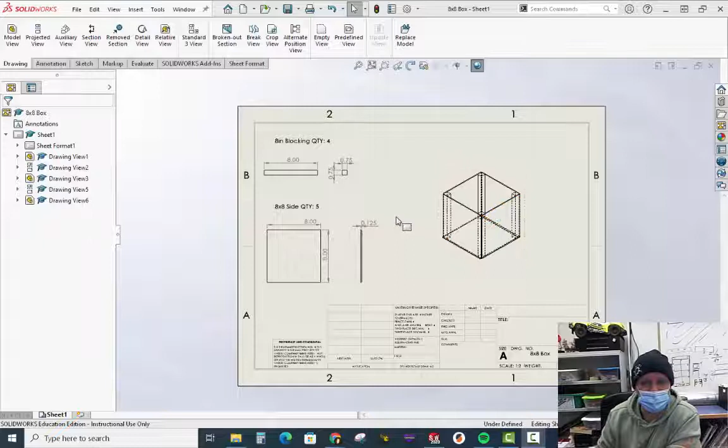All right, I am going to completely delete this file so I can start over. Blank SolidWorks, I'm going to go to New.

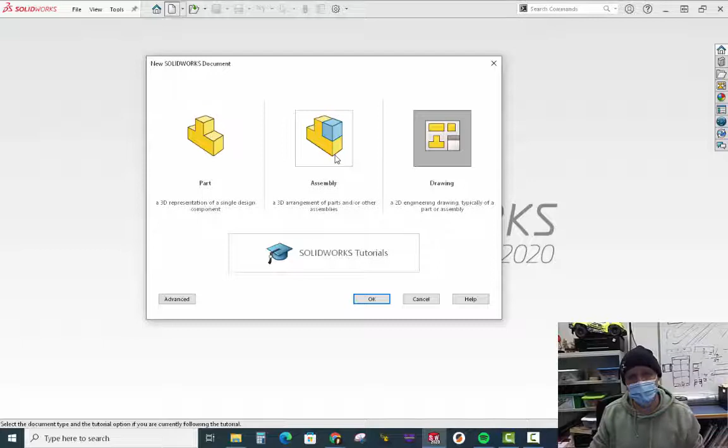You guys have made parts, that would be the sides or the blocking. You've made an assembly, that's your final box. We're going to be doing a drawing. So this is a two-dimensional engineering drawing.

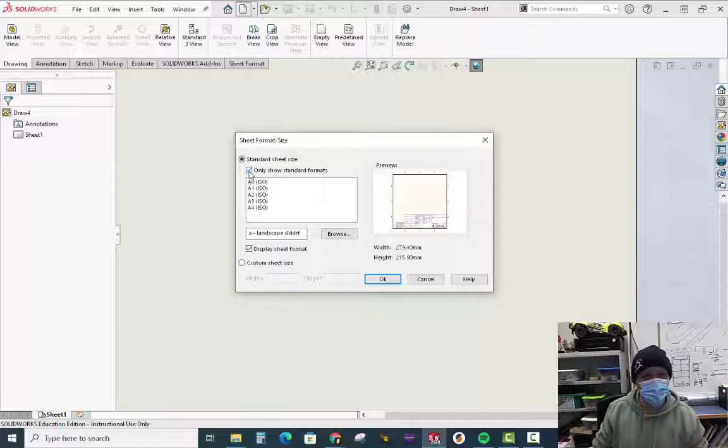It's going to be on a piece of paper, so the first thing we need to do is establish that size of paper. You might look like this, in which case we only have 5 options, none of them are good. So I'm going to unselect that, and we can see size A paper, which is what you guys know is 8.5 by 11, and I want a landscape orientation. And there we go, landscape, 8.5 by 11. I like it, let's do it.

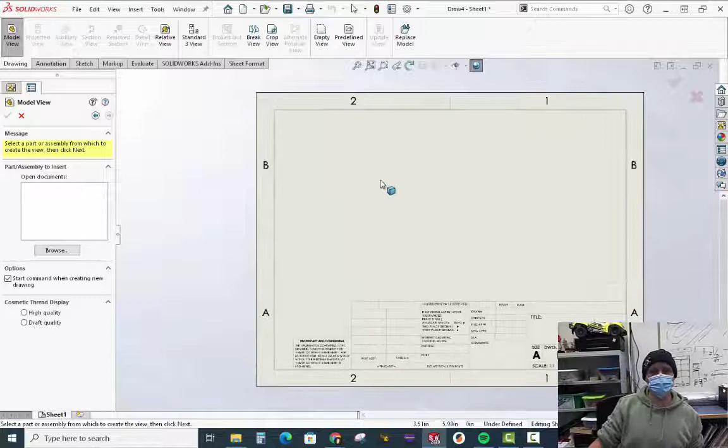And this is literally our sheet of paper. So just like when you guys are working in Google Docs, you're editing a piece of paper, and that's what we're doing.

Model view is the first step we need to do. It opens up automatically for you, or alternatively it is the first button here. We're going to browse to one of our parts. In this case, I'm going to do the side first. We open it up, and wow, that's how big the view is.

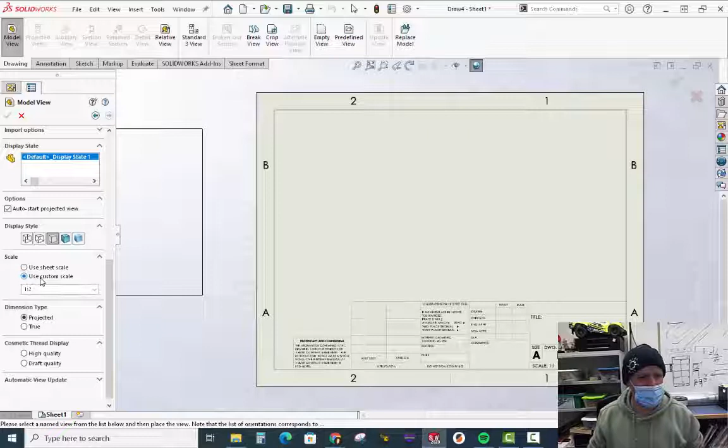You guys saw how much stuff we're going to line up here. Well, that's too big. So I'm going to come down here to scale, use a custom scale of 1 to 5. Much smaller. Now this is what I want, it looks like the side of the box, so that's a good thing.

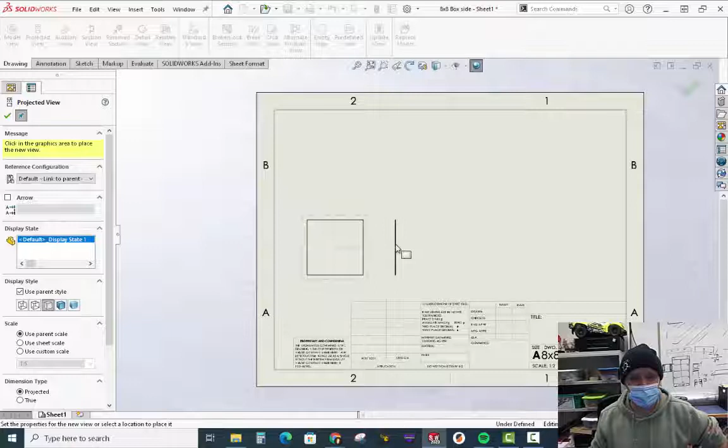I click it, and automatically I move into the projected view tool, which you guys notice here is the second button in our drawing ribbon. And that's actually going to project my side view. Bam, no more construction lines, no more counting and measuring, the software is going to do it for us. I like what I see, I'm going to hit OK.

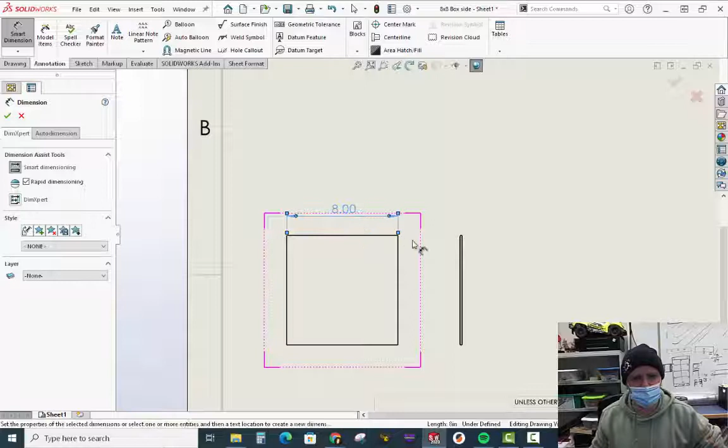And the next thing I'm going to do is go down to Annotation, Smart Dimension, and I'm going to create my width, my height. I'll zoom in here and create my thickness.

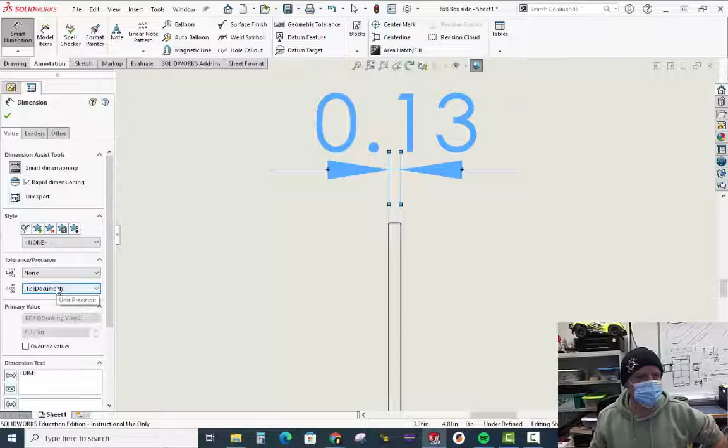Now the thickness on here is 0.13. We want it to say 0.125 because that's the actual number. We can go down here to tolerance and precision, and we're going to increase our precision to 3 decimals. SolidWorks stops rounding it, we have 0.125. All right, there it is.

If I make that, I have my box. No, I need more information, I need to know how many sides I need to make.

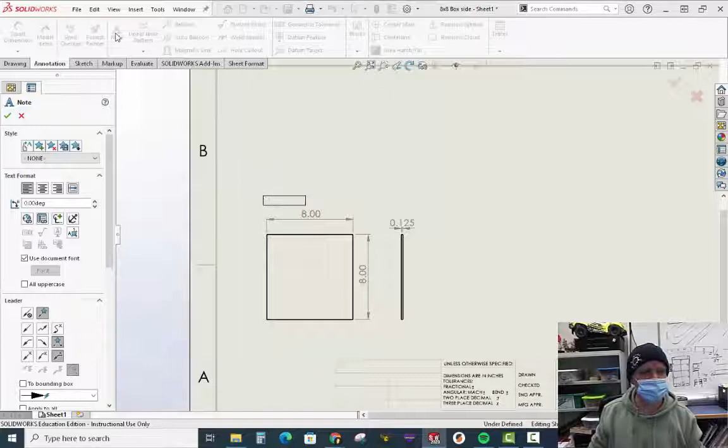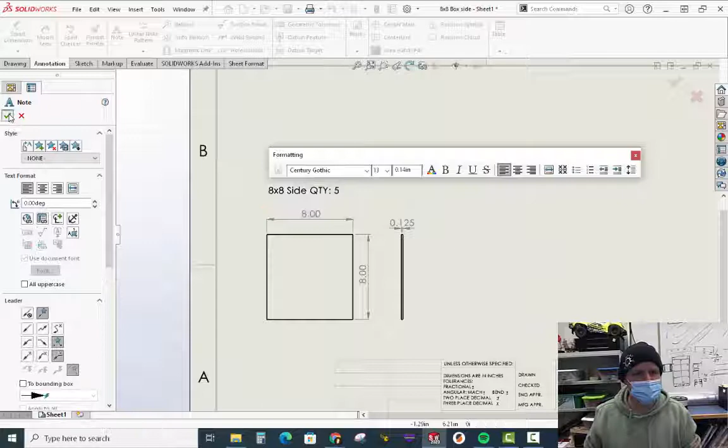So I click Note up here, I'm going to put a note above it, and I just want this to say 8x8 side, QTY, just short for quantity, 5. Oh, enter doesn't work, I'm going to go over here and hit the checkbox. Looking good. So I'm going to go through the same steps a little bit faster for the blocking.

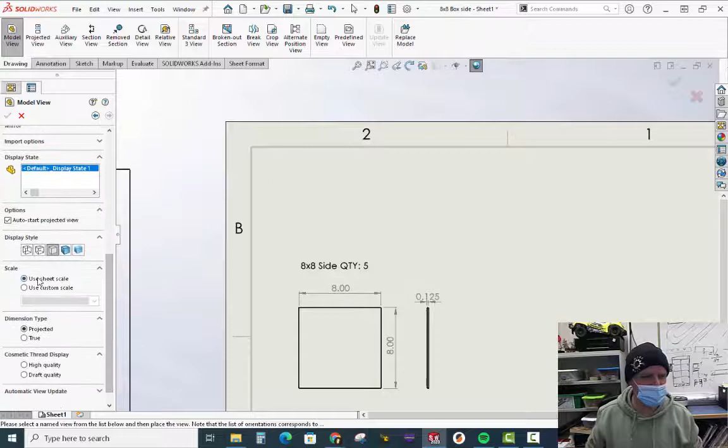Drawing, model view. Browse, blocking. Size is too big, so I'll use a custom scale of 1/5. Looking good.

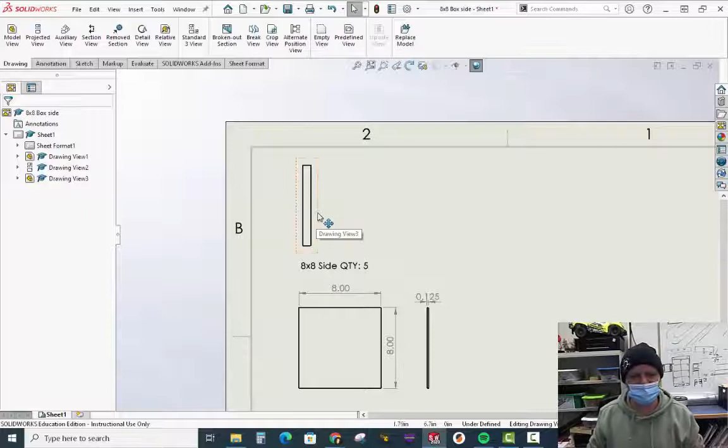Now, I'm not going to do a projected view yet because I want to rotate this. If I had it the long way here laying down, it's going to be easier to put that side view in, it's just going to look better. So I'm going to right click on that, go to zoom, pan, and rotate, rotate view 90 degrees. Apply. Close. Slide this over so it's a little bit more lined up.

Looks good. Projected view. Already had this part selected. Sometimes you'd have to click on it. Otherwise, there's my side view.

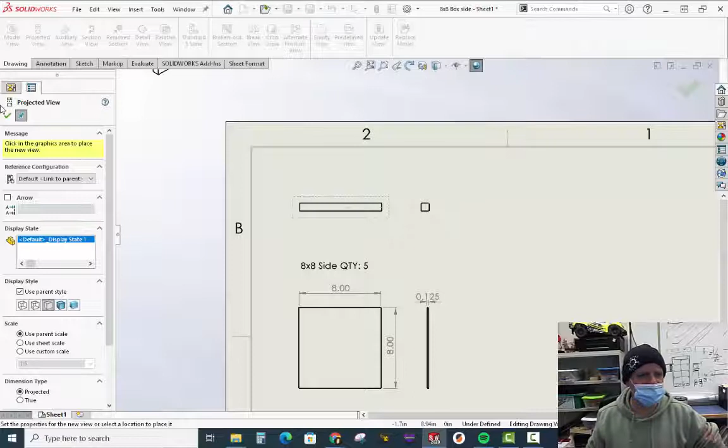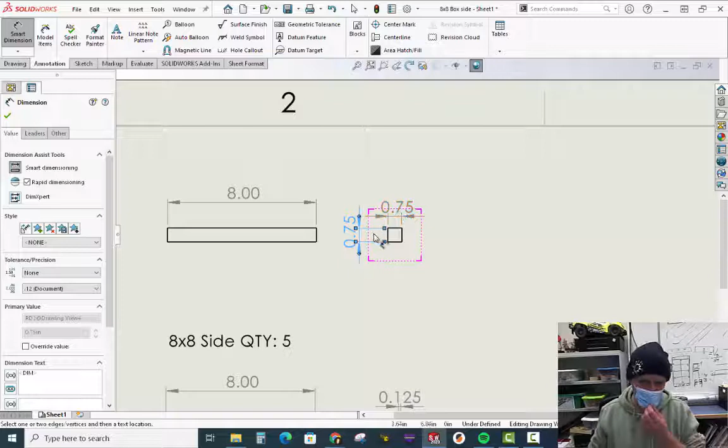Hit OK. Annotation. Smart dimension. Length. And I'm going to put my width and depth here on the same view, because that's how you make it, right? I'm making you guys strips that are 3/4 by 3/4. I want all that information in one view. Length goes here.

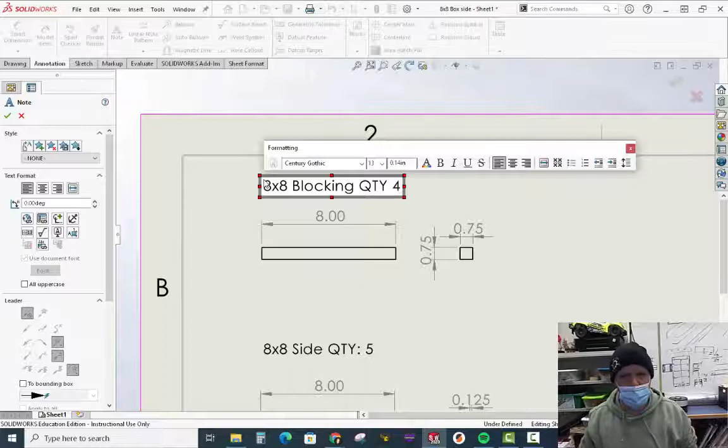All right, let's put my note in there real quick: 8x8 blocking, QTY, four, like that little colon in there.

All right, last step is I need to show how all of these go together. To do that, I want to go get a model view.

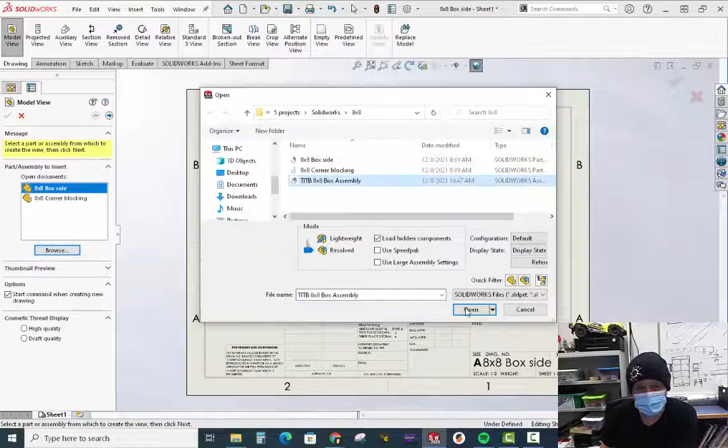I'm going to browse and grab my assembly. And the assembly is going to take up that much space. I'm actually going to make sure that scale is a little bigger, I'm going to go to 1 to 2. Yeah, that'll fit.

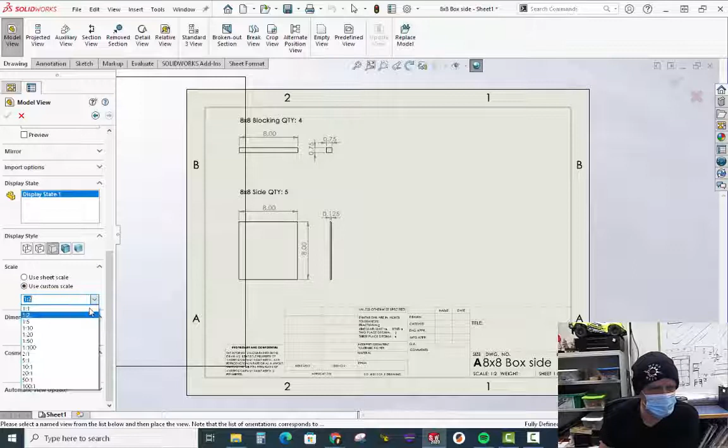And I'm going to choose isometric, and I'll show you guys. Whoa, it's way too big. Let's go back down to that custom scale of 1 to 5. That takes up most of the room.

Check that out. Last thing I want to do before I hit OK is go ahead and show all those hidden lines. Boy, that's a lot easier than that isometric I made you guys draw. Sorry, not sorry. But there you guys go.

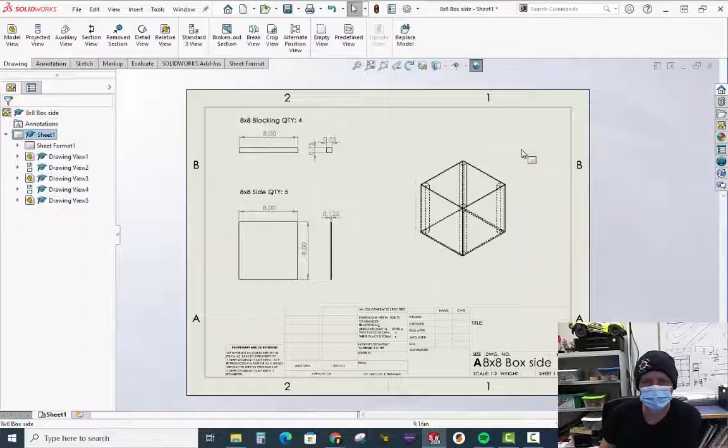Check this out. You guys bring this into the shop, it tells you everything you need to make, tells you how big to make everything, tells you where to put them. Everything you guys need to know to reproduce your box.

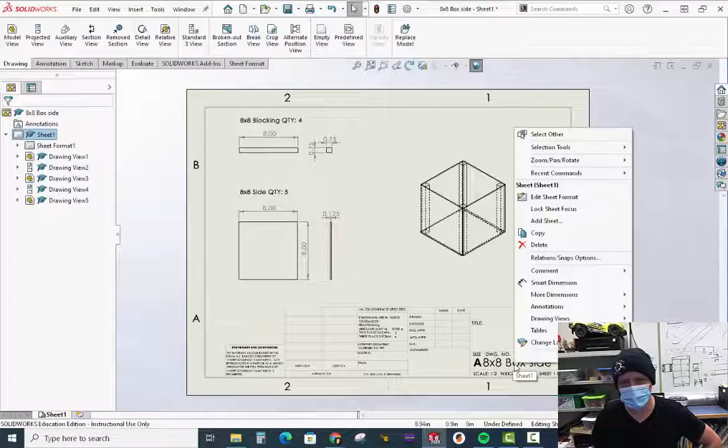One last little tip. If you guys go down here, your drawing number, which is the name of your file, might be too big. See how mine's starting to bust through the sides here? What you guys are going to do is right-click on this, go to Edit Sheet Format. That breaks you into the title block here. You can double-click on those words, and I'm going to bring down the size of the font to 1/8 of an inch tall.

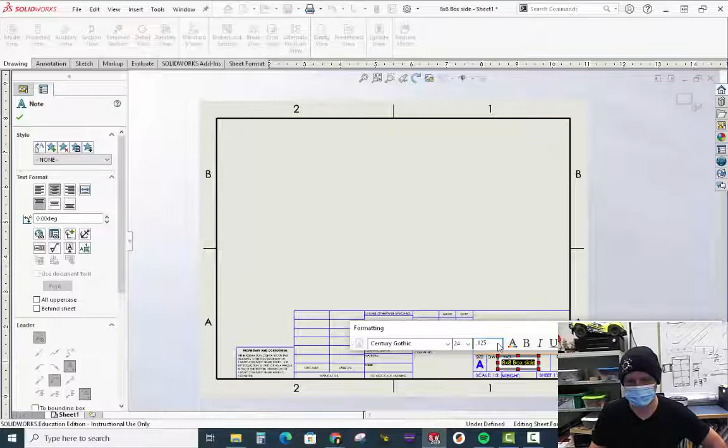Sometimes this formatting bar doesn't come up, you guys can find it here in font. Let's hit enter here, that gets nice and small. Hit the checkbox. And the last thing I need to do is right here, which is going to remove myself from sheet formatting. And I'm ready to go.

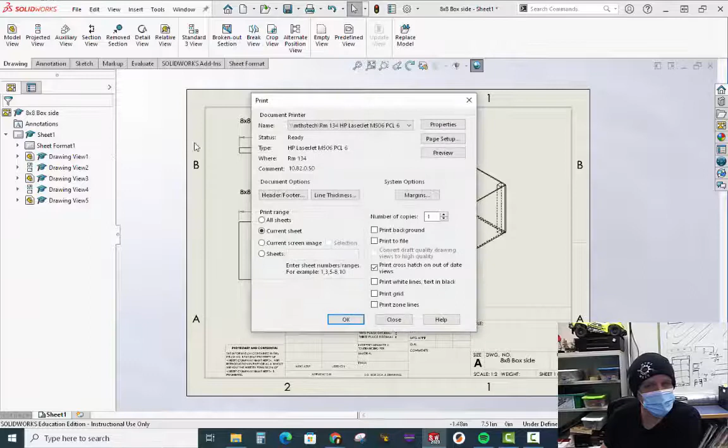In order to turn this in, you guys are going to go to File, Print. Make sure your printer is pointed to room 134. That is the printer right there in my classroom.